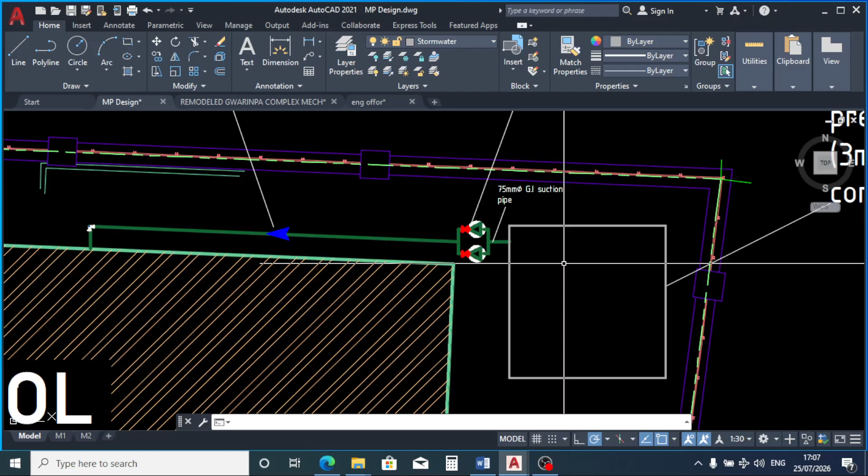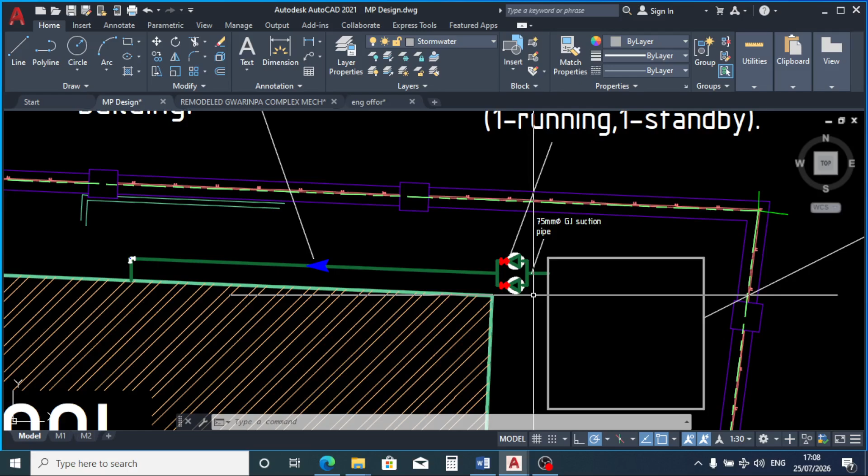Let's make a quick recap. The fire hose reel and the fire extinguishers we placed are first aid firefighting systems. They are expected to curtail and prevent the spread of fire until the fire brigade comes to site to fight the fire professionally, and that is why the pumps are designed to work for a minimum of 2 hours. By then it is expected that the fire brigades have arrived to do the needful.

We are using a discharge pipe of 50 millimeter diameter, and that is why we chose to use a suction pipe of 75 millimeter diameter, to make it bigger than the discharge pipe in order to prevent cavitation and subsequent pump impeller damage.

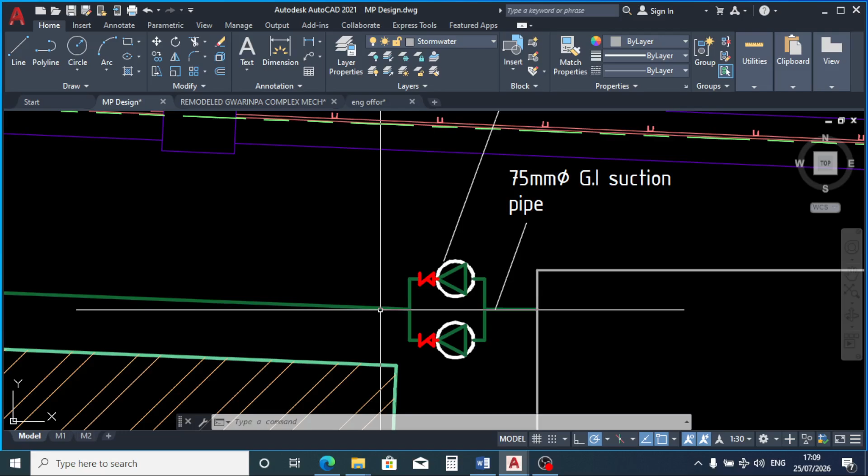When the suction line is less than the discharge line, there will be cavitation, and that is detrimental to the pump impeller and seals. So the least you can do is to make the suction line equal to the discharge line. Even at that, I don't advise you to do that. I always prefer the suction line to be a bit bigger. For this suction line, you can make it 75 or 63 millimeter diameter.

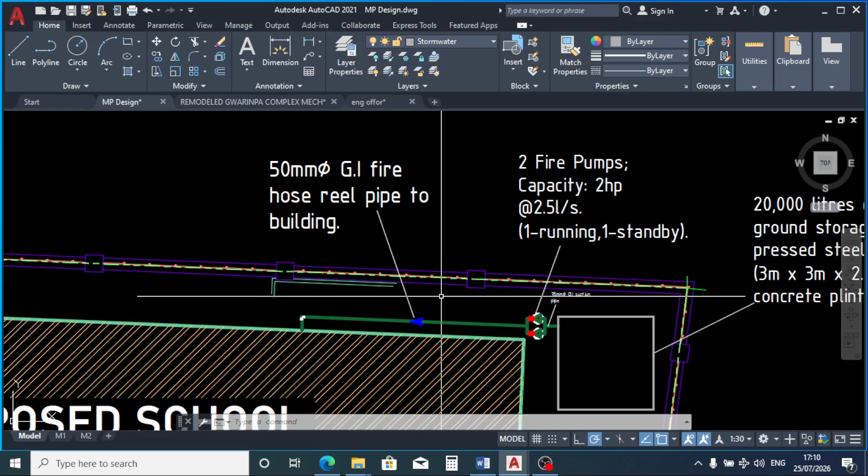We are choosing the discharge pipe of 50 millimeter diameter. Why? Because our building is not up to 15 meters in height. According to some publications, for example, Design and Practical Handbook on Plumbing, authored by C.R. Mohan and Vivek Anand, buildings that are less than 15 meters in height can use a firefighting discharge pipe of 50 millimeter diameter. If the building is more than 15 meters, it is advisable you use a higher diameter. So that is that for our recap.

Now I want to introduce a jockey pump to this setup. What is a jockey pump? A jockey pump is a minor pump. What it does is boost this wet pipe, this discharge pipe, at all times. Over time there will be minor leakages, there will be evaporation when the weather is temperate, so there will be pressure drop. The water in this pipe will tend to reduce. So the work of the booster pump or jockey pump is to activate automatically once it detects that pressure drop, and boost this pipe to make sure that the pipe is always charged with water.

It is not expected to fight fire. In the event of fire, the pressure drop will be much. Why? Because the fire hose reel is being utilized at that point in time. So the jockey pump does not have the capacity to replenish this pipe. That is why we have the main pumps. In the event of fire, these main pumps take charge and the jockey pump stays idle.

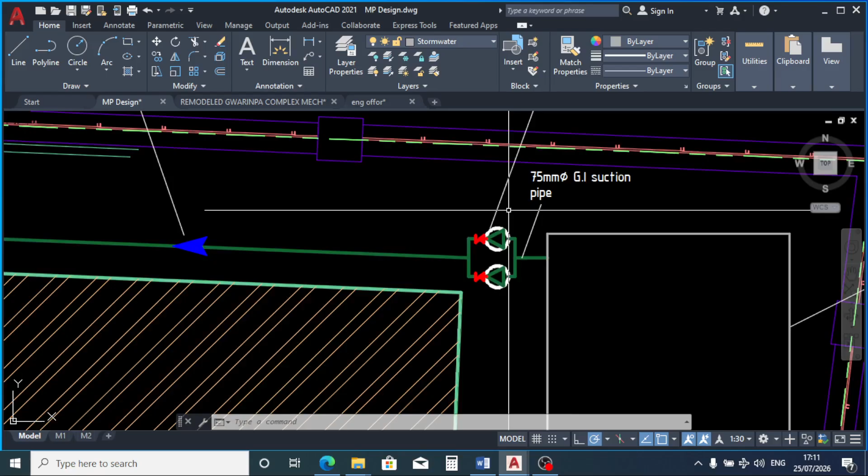The main pump that will take over is the electric pump. But when there is a power outage, when there is no electricity, the diesel pump will take charge, and the electric pump and the jockey pump will remain idle. So that is the idea behind the jockey pump. So let's bring in something to represent our jockey pump. Alright, I believe this will do.

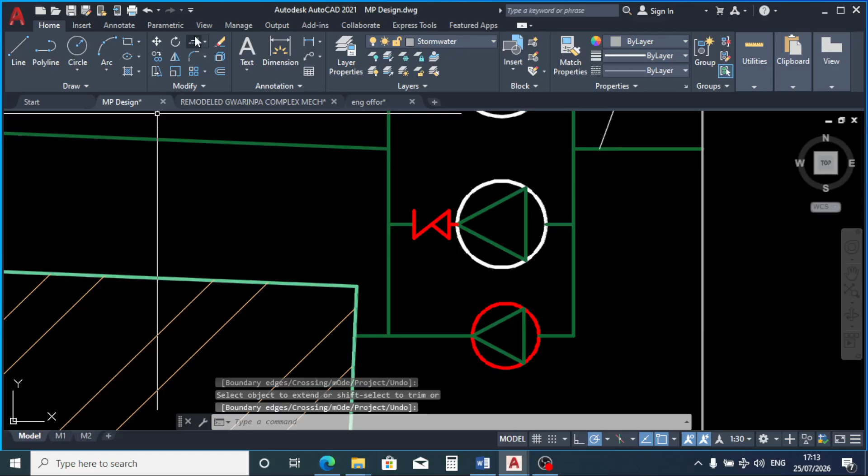So our jockey pump is now being fed from the suction line, just like the rest of our pumps, and it also discharges to this line, taking the water all the way to the fire hose reel.

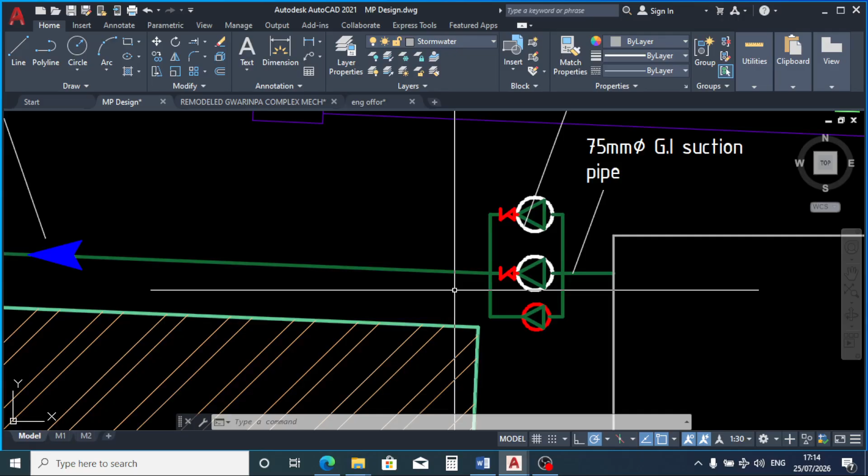Alright, so let's perfect this connection. What I mean by perfecting this connection is, let's bring in the isolation valve, the check valve or non-return valve, and also the strainer. Yes, the strainer is another important component in this connection. The Y strainer. We are going to be making use of a Y strainer on this suction line to protect the impeller and seals of this pump. This strainer serves as a filter to filter debris or solid particles coming out from this tank to feed this suction line.

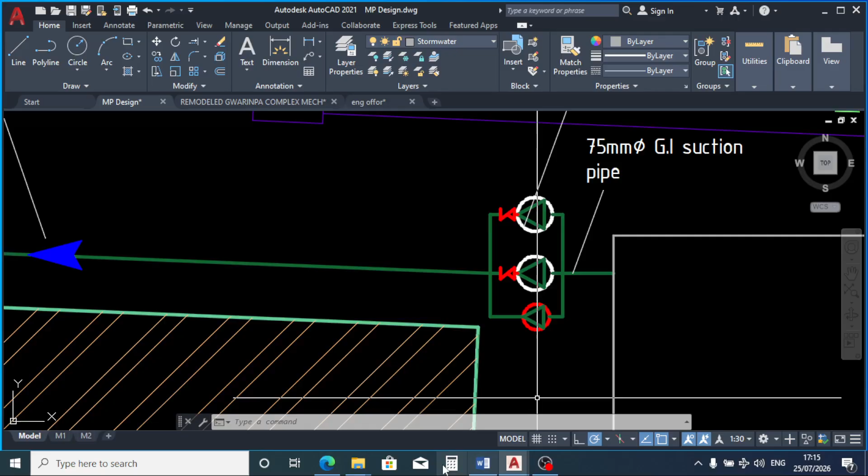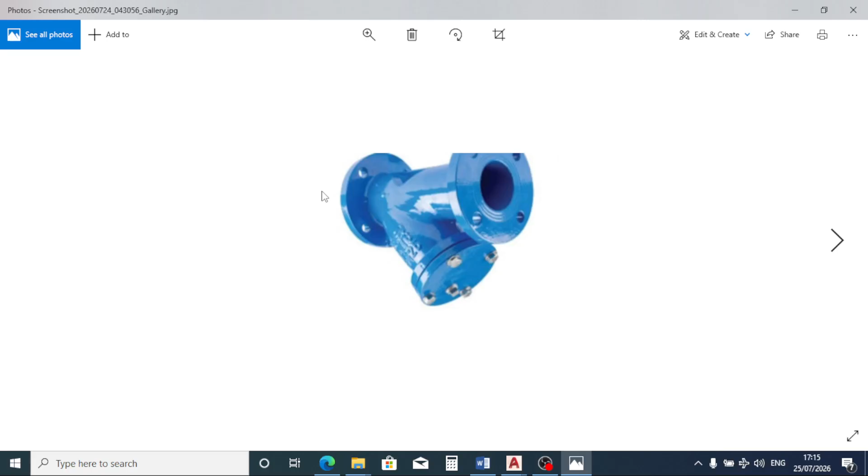Let me show you what I mean. So this is a strainer. Water comes from this inlet, this direction, and comes out through this outlet. But before it comes out through this outlet, it goes into this section of the strainer. Inside this section, this pocket, there is a filter, a mesh screen that traps solids in order not to feed the pump with the solids.

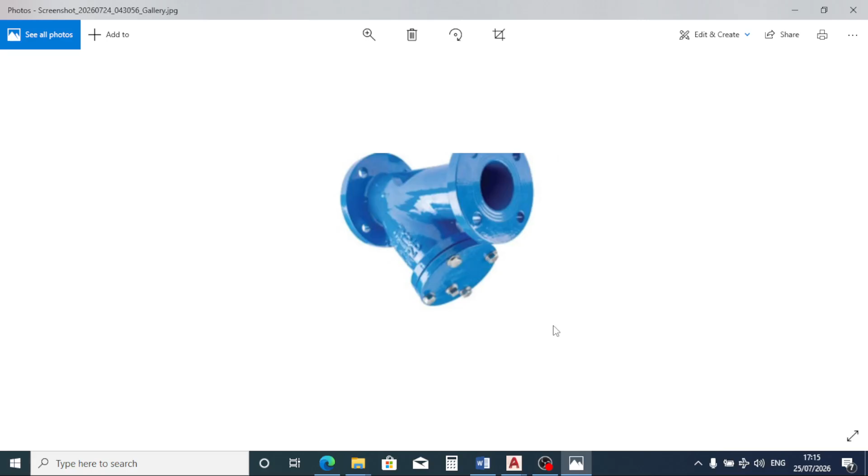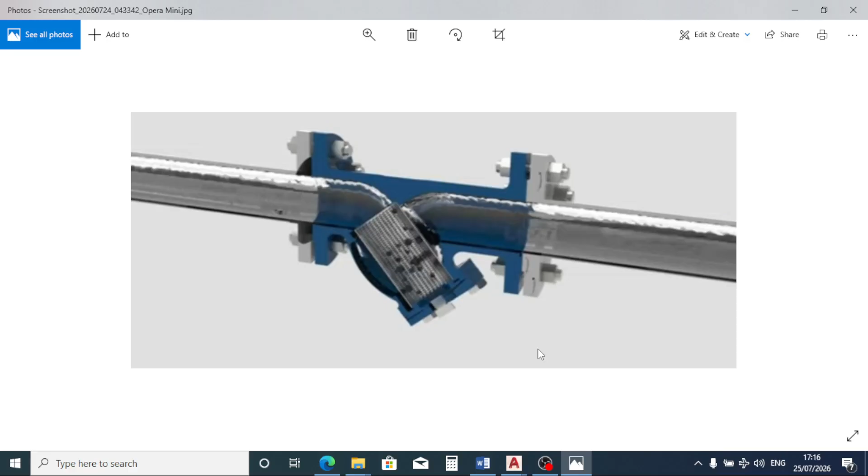So this is a typical example of how it works. Once the water comes in, you can see the water first enters into the mesh. These black particles you are seeing are the debris, the solids, and then clean water goes out through the outlet to gain access to the pump. So this is the mesh screen. You can see it, the filter, right?

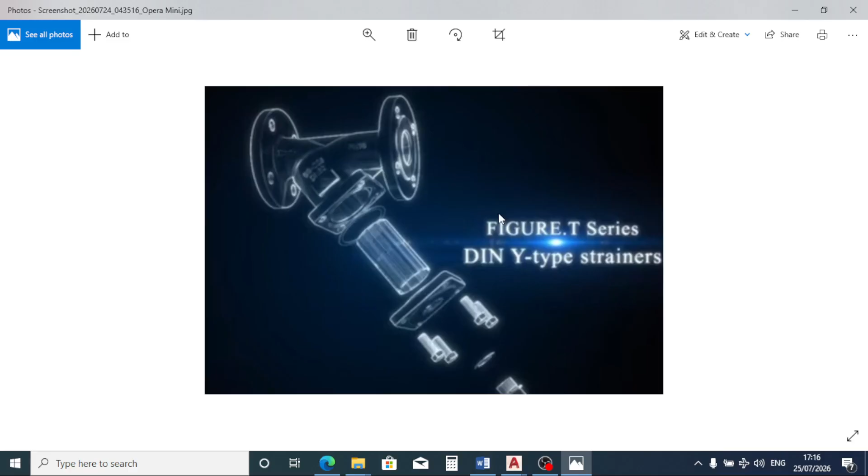This is it. For our jockey pump, this is a jockey pump. You can see it's a vertical component. Remember I told you its function is just to boost. Alright, so

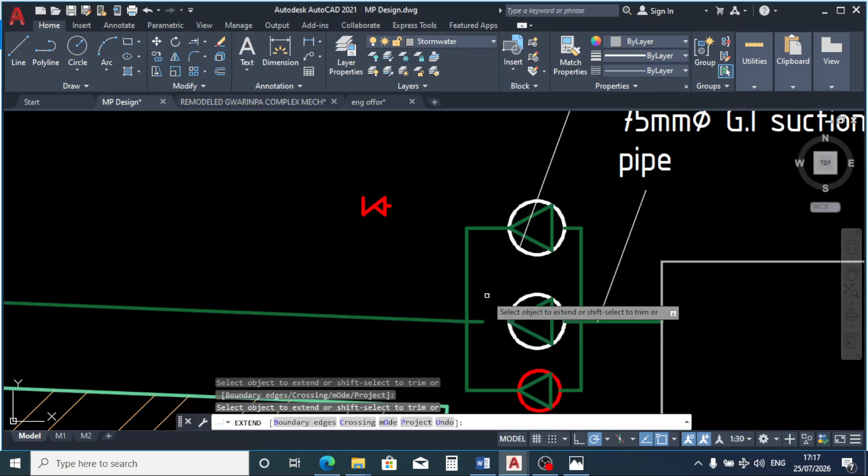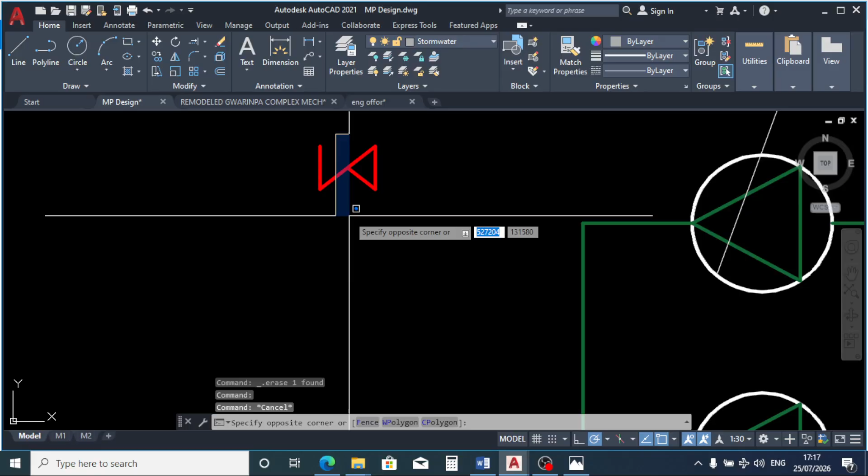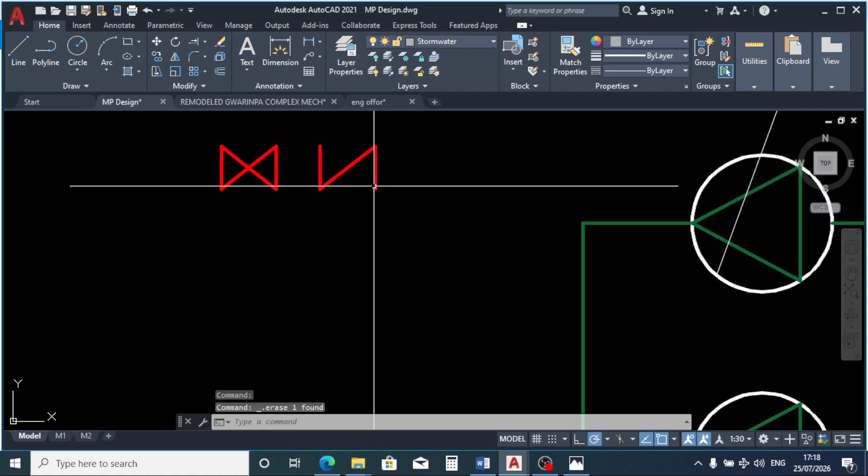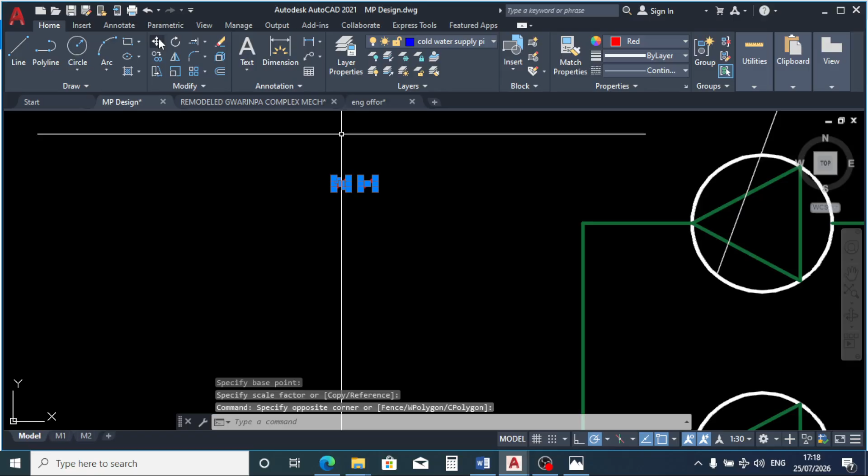let's use this drawing to create our isolation valve or gate valve and our non-return valve. So this will represent our non-return valve or check valve. This will represent our shut-off valve or isolation valve, also known as gate valve in this case. Let's reduce the scale. I'll explain their functions and the order in which they are to be placed.

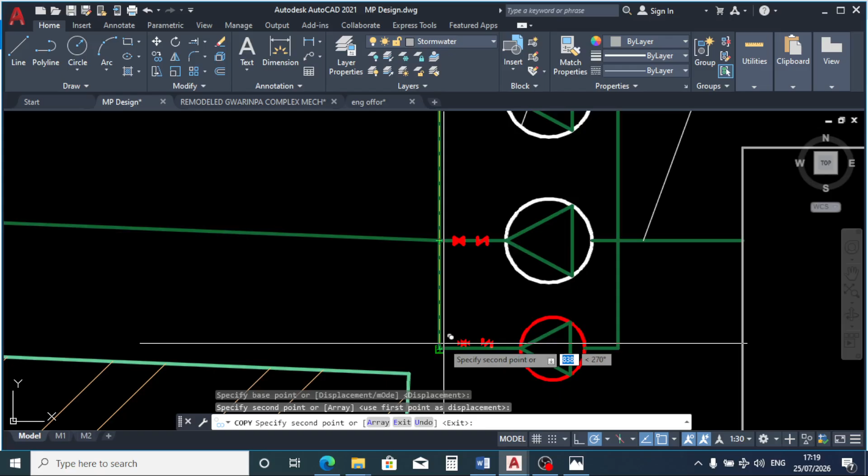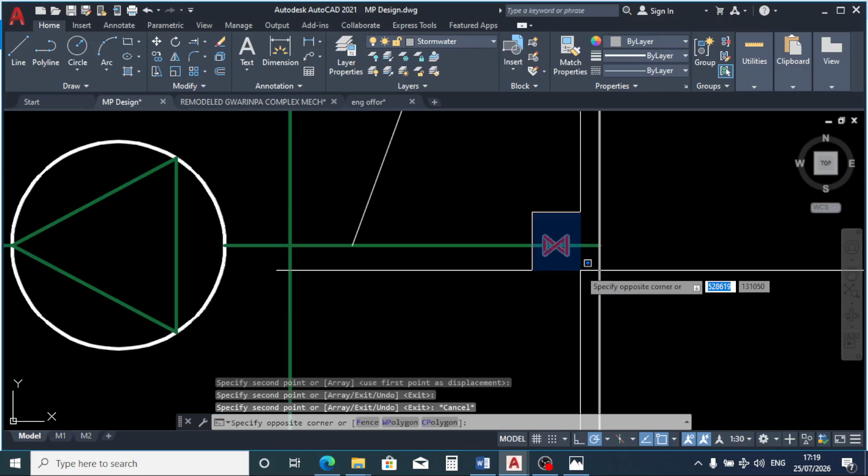Let's include a gate valve on this discharge line as well, and our suction line. Now let's bring in something to represent our strainer.

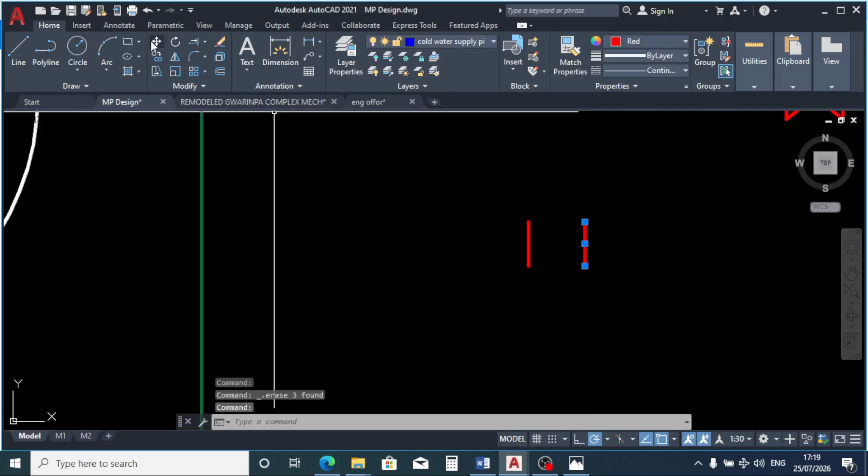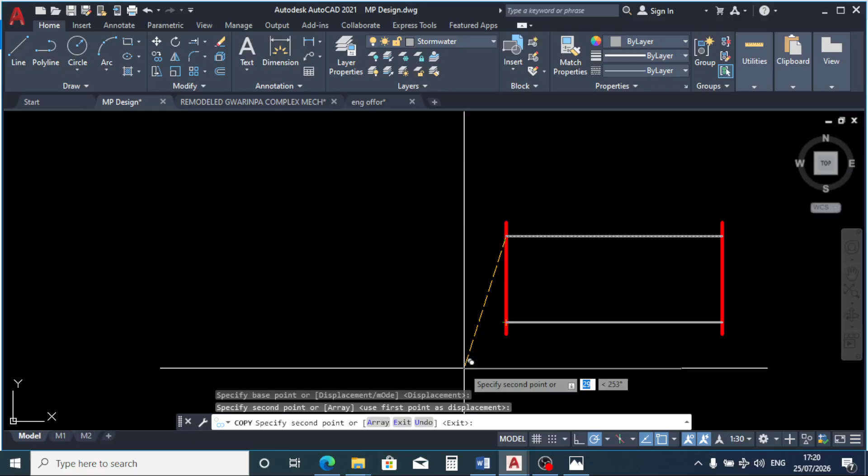Because we are viewing it from the top, we will not be seeing the pocket where the mesh is located. But I believe you get the idea. And don't worry, when we bring in our tank elevation, we will place it.

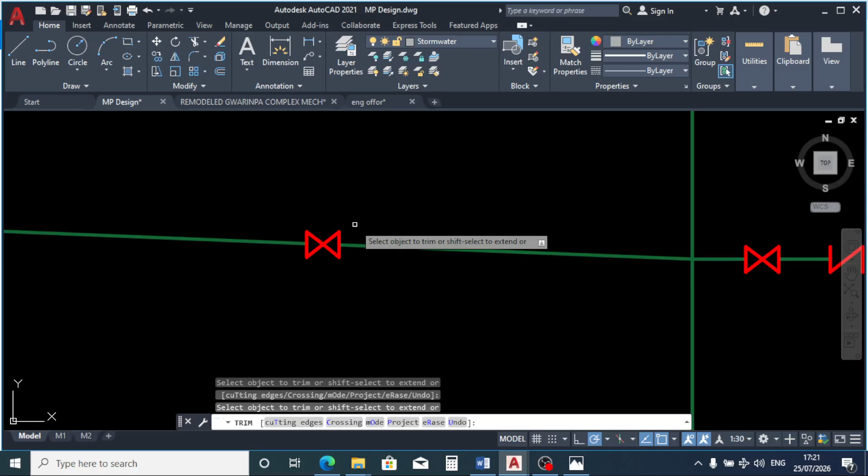Okay, so now let me explain. This is a gate valve. It is positioned before the strainer on the suction line. You don't place a strainer on the discharge line, you only place it on the suction line. Why? Because that is where the water makes its first entry into the pump. So to protect the impellers and seals, you position the strainer before the pump, but after the gate valve.

Why are you placing it after the isolation valve or gate valve? In case you want to carry out any maintenance on the strainer or you want to replace the strainer, all you need to do is to shut off this valve in order not to drain the whole water in this tank, not to drain the whole system, just because you want to carry out maintenance on this strainer. So that is why it's positioned after the gate valve.

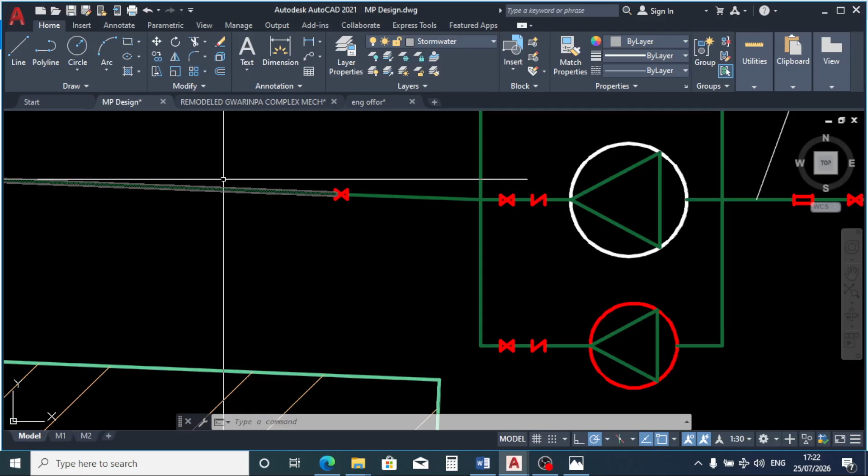The same goes for the non-return valve or check valve and the gate valve here. When you want to carry out any maintenance on this check valve, you just shut off this valve in order not to drain the system, this wet pipe. Remember, I told you that this wet pipe is supposed to be charged with water at all times. So in order not to drain this wet pipe, that is why we are placing the gate valve after the check valve. So when you are carrying out any maintenance on this check valve, you just shut off this valve and carry out your maintenance accordingly.

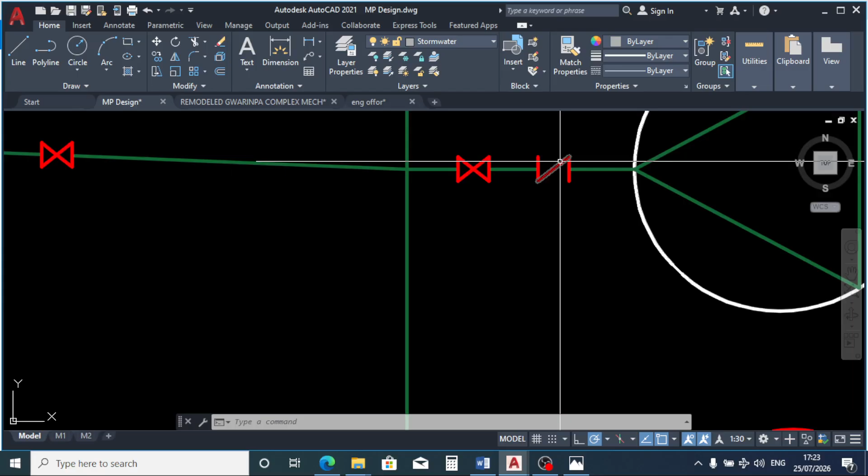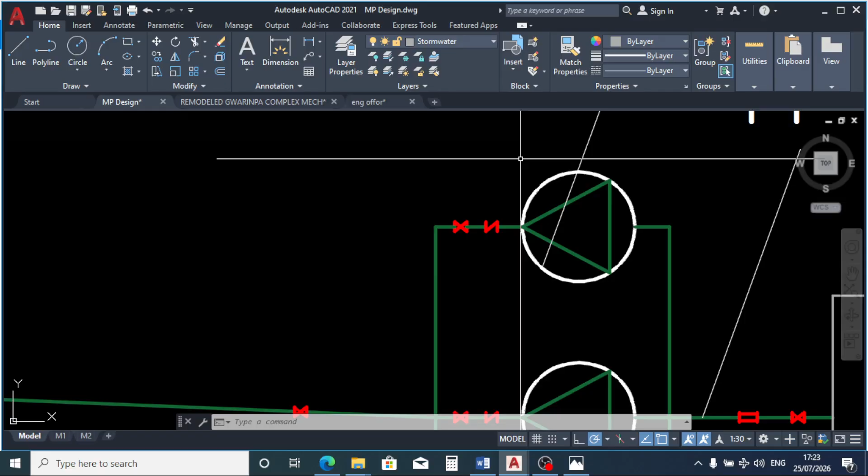So the purpose of this check valve now is, when there are minor losses on this discharge pipe, the jockey pump activates. Now it will be forcing water to this line up to this point. So that force will make water go into these pumps to create water hammer and reverse flow, which might damage the pumps.

So now, even though there is a gate valve, at times the gate valve can be mistakenly left open, or it might be faulty. So this non-return valve will not allow the water coming out from the jockey pump to find its way back into either of the pumps, whether the electric or the diesel. That is why they all have non-return valves.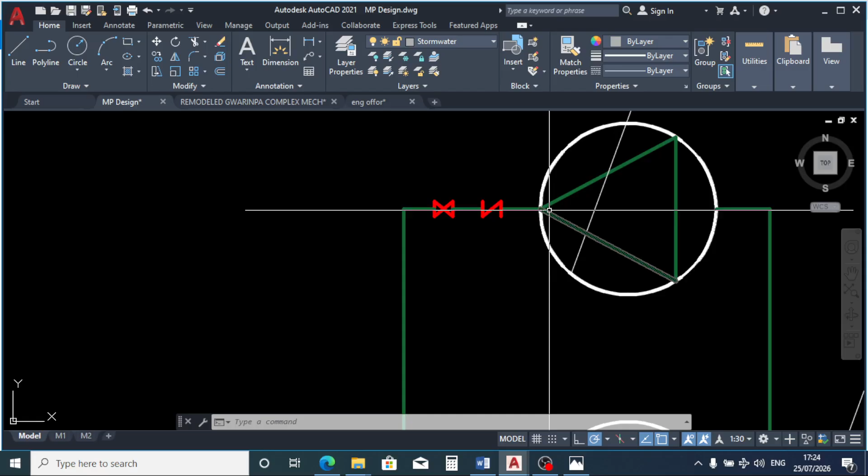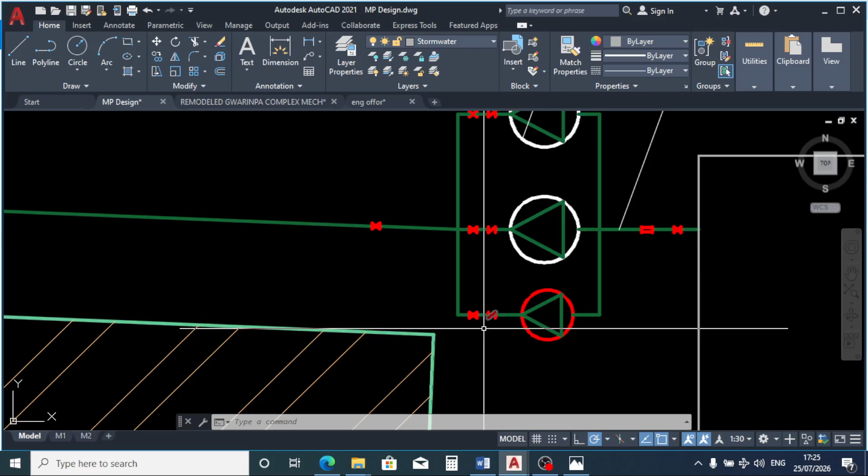So likewise, if the electric pump is working and these two are idle, water will of course tend to come back into the pumps. So this non-return valve will not allow the water to find its way into the pumps. It only allows flow in one direction, and that is this direction, the left side. The pump can only discharge water to come through this line, but the water cannot find its way back into the pump due to the non-return valve. So that is that about the check valve and the gate valve.

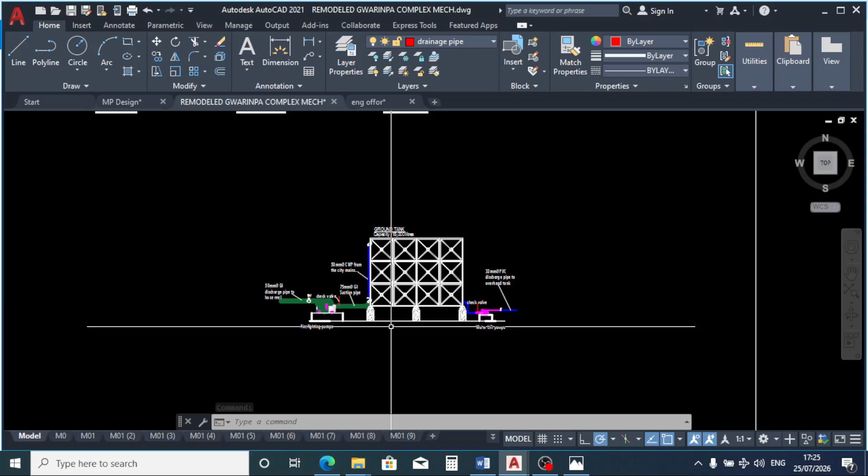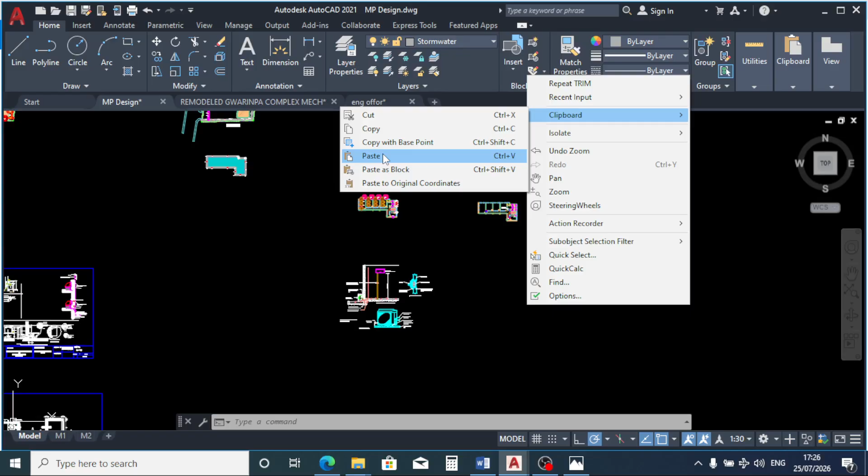Now let's bring in our tank elevation for detailing. Why are you hooking? All right. Okay, let's copy this to our drawing. So now this elevation will make us understand more, especially the strainer part.

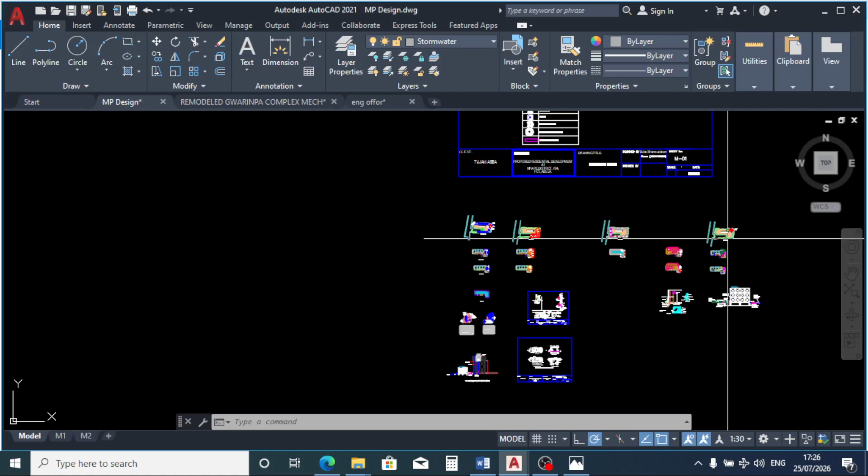Okay, this is our fire pump, this is our lift pump. No, in this case this water lift pump, that is the pump that takes water from the ground tank to our overhead tank, will not be visible. Why? Because you can see the position of the lift pump, it's at this side of the tank, while the fire pump is on this side. So when you are viewing the fire pump and tank from this side, the lift pump will not be visible. So we are going to take it out of the picture now.

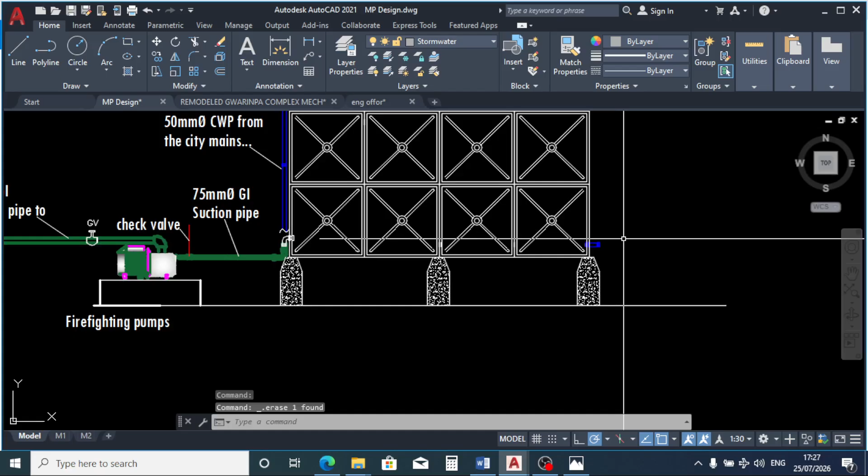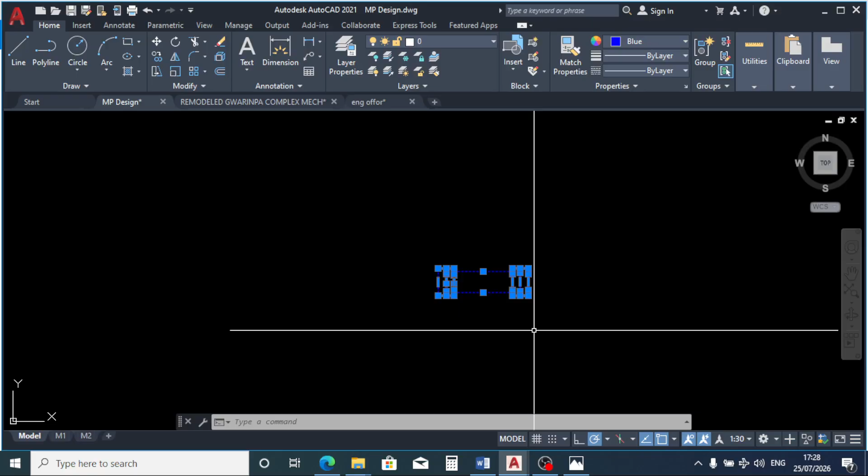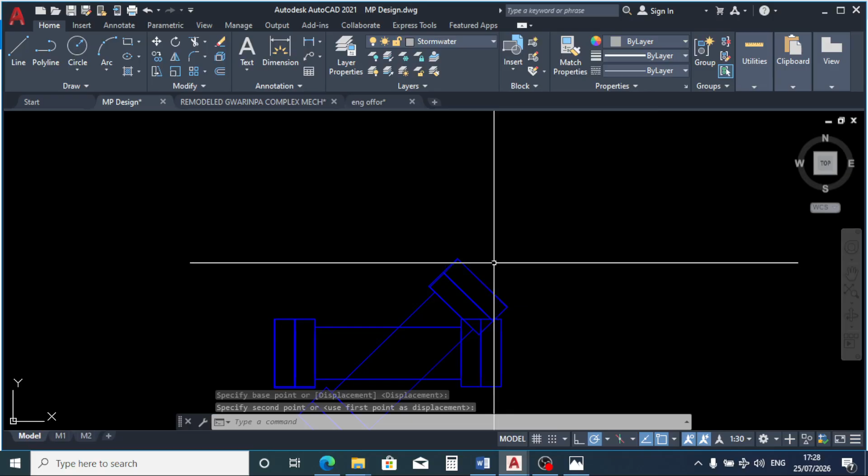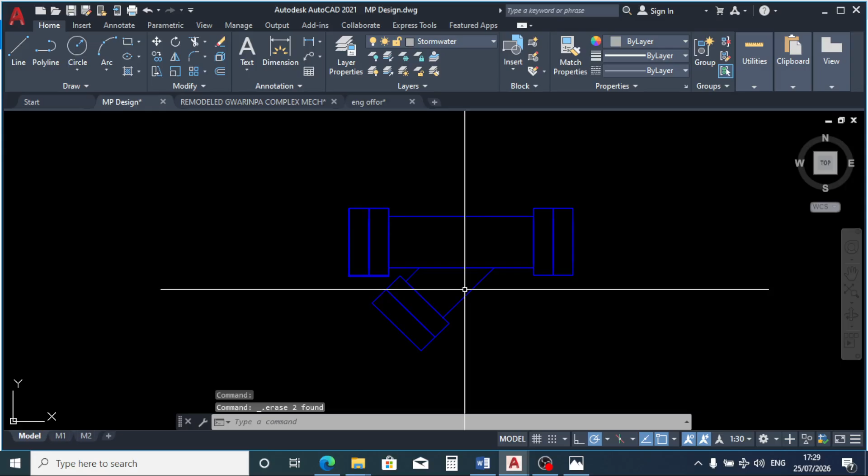Alright, so let's draw something to represent our strainer. Let's copy this. Instead of drawing the strainer all over, we can just use this component and convert it into a strainer, a Y strainer. That is what we are going to be using. To 45 degrees. Okay. I think this can represent our strainer. Yes. So let's give it a red color.

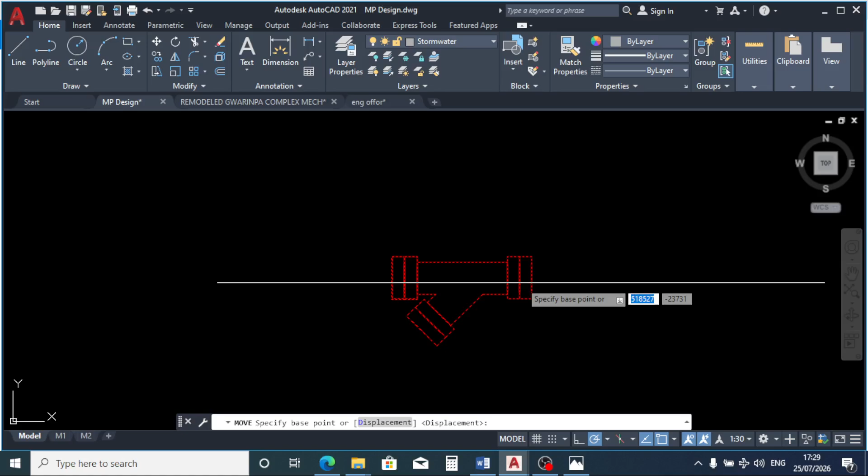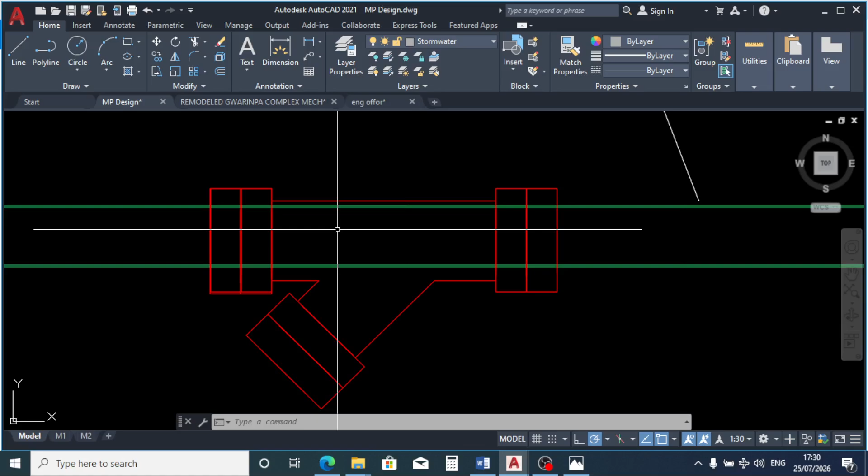Yes, so now this is the way to position the strainer if the water is coming from this side, so that it will first make its way to this pocket, then the filter traps the debris, and clean water moves out to the pump. And the pocket should always face down, so that the debris will be acted upon by gravity.

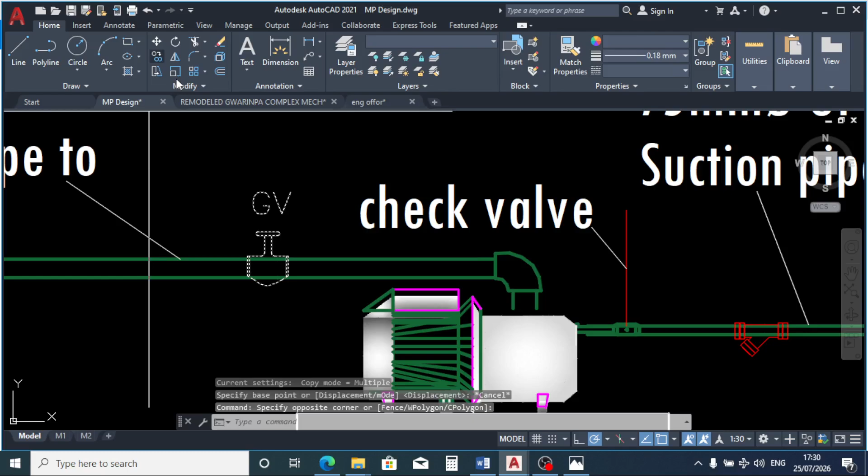Now the next thing is our isolation valve, which is a gate valve in this case. I believe you know about valves. It's not all the time that a gate valve serves as an isolation valve. We have many other valves like butterfly valves, needle valves, and so on. It depends on the purpose you want the valve to serve.

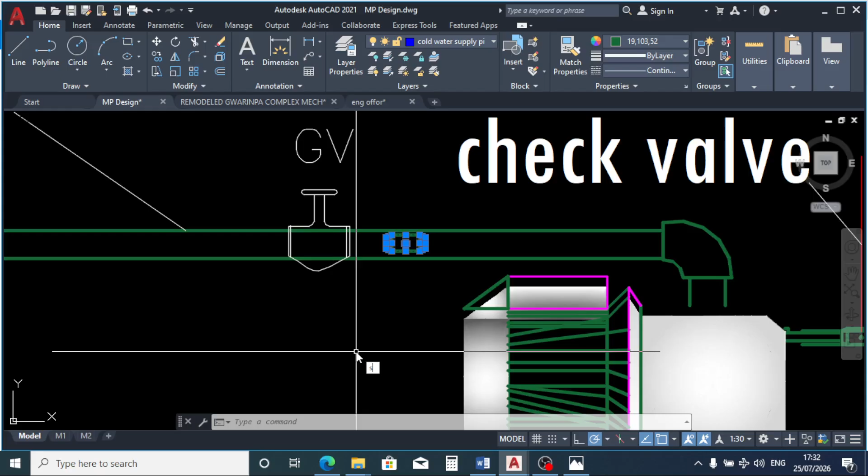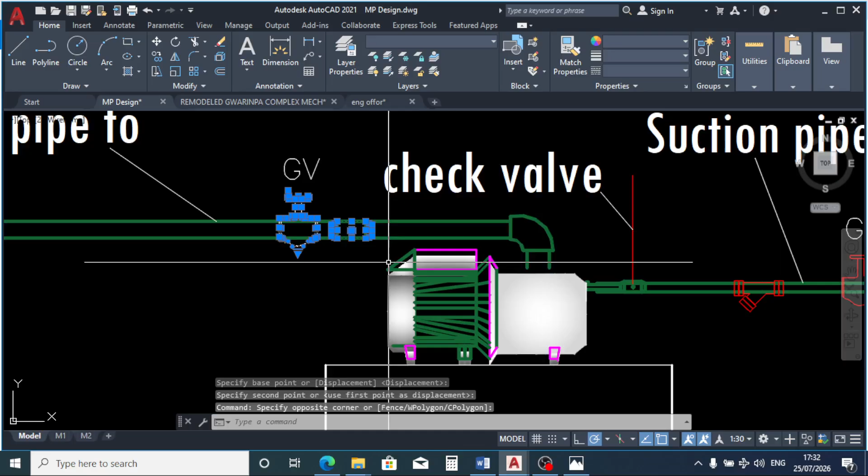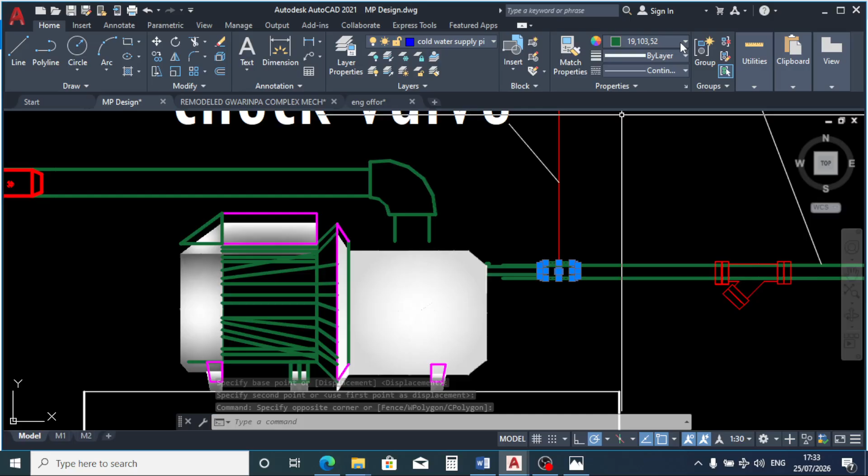So this is our check valve. Let's convert them all to red. So I believe this connection is okay. Now let's bring in something to represent the elevation of our jockey pump.